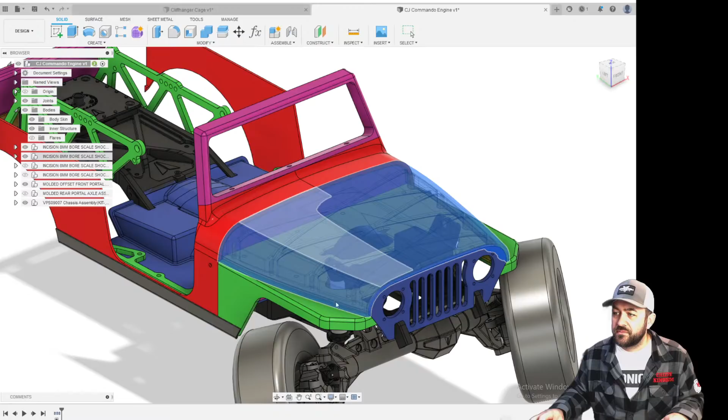We could even do that right now if I wanted - could delete that hood out, let it get mad at me for a moment. Whoops, we deleted far too much. That was fun. Undo, regen. Remove, not delete - that's what we needed.

So I'm going to go ahead and bring in the hood, we'll just do it from body split - that one should be correct. Make it a shaker, more space - not interested, I'm not interested in that look on a Jeep. That's not something this is going to be - I want it to still look like a normal vehicle should.

Let me try this one more time. I need to find the correct file - I think my front bumper one had the correct hood in there. I have a lot of files for this project, I didn't break it up well enough at the beginning, but I'm trying to do so more now towards the end where I only have to worry about what parts are in that vehicle. So, hood, bring it in. There we go - there's our regular everyday hood that will be in here.

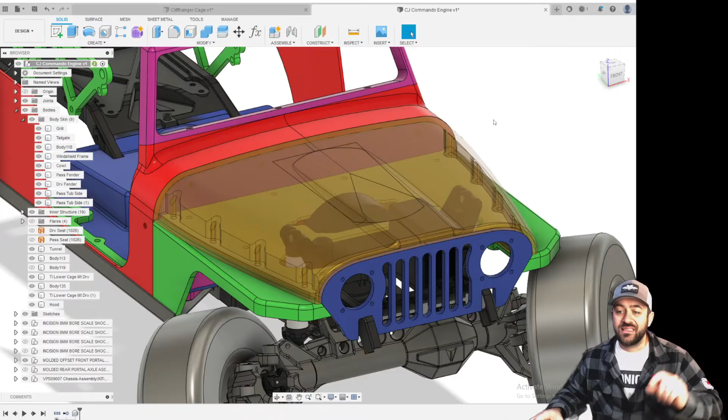So anyway, that is the point. Now, like I was saying, I wanted to bring in a model. I've downloaded what was on GrabCAD. I can go back to it for just a second and search LS Engine.

Here you see a bunch of different LS Engine things. Here's a bunch of different LS engines, from just heads to big supercharged LSX style, which actually looks like a really nice model, supercharged and all that. This is not the one I downloaded, although that's a very reasonable one to have. The one I have downloaded, I've had in the past, and it was this version, I believe.

It doesn't matter. Let's bring it in and see how it looks and what it's going to take. Actually, I can't do an insert derive, I have to bring in the actual file here, which I've got in a file I created, LS Engine. I already extracted it because it comes in a zip, so we've got IGS files, SAT, and STEP.

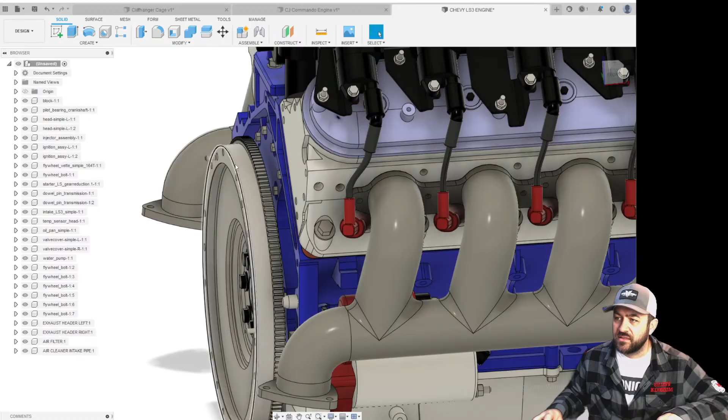Torque converter, bell housing, we got a flywheel. We aren't going to need these exhaust manifolds either, or flywheel bolts, water pump. We don't need any of that, so let's get rid of all of those things.

We got a lot of those, at least that hardware. Okay, that hardware is built in. We don't need a starter. There's another bolt. That's right in the block, that's okay. Air filter, we also are not going to need.

Don't need the intake pipe. We don't need the injector assembly. Things like this, we just have to be reasonable with the amount of detail. Even coil packs, we don't need coil packs. Now, the problem is they are part of...

Are they a part of the... No, that's just a similar color. Okay, I was going to say, it looked like they were part of the valve cover.

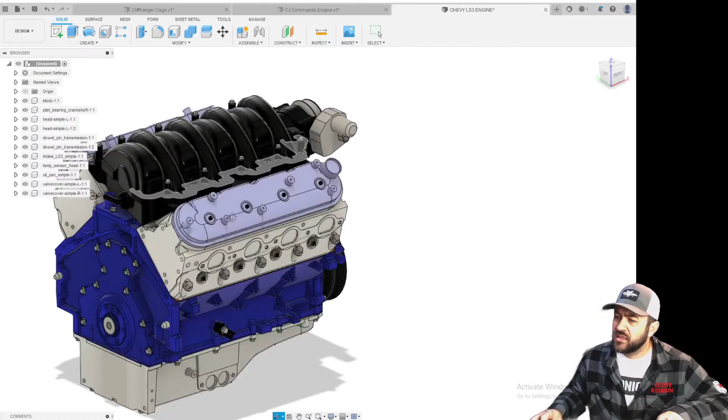So stripping this thing down, we're looking much better. Pilot bearing, don't need that for sure. Simple head, dowel pins, those are unneeded. Temp sensor, one temp sensor in there, get rid of that guy.

Josh has told me, how does Nicole make a coffee? Cream and sugar or just a... no, it's a Nespresso, so it's a little thing, mix it there, and then we have a milk frother, so I have nice foam, and this is actually coconut milk. Ah, so good.

Oil pan, even the oil pan we're not going to need because we have all kinds of things in the way, but we'll leave that on there for now. We'll leave the, oh, I guess the pulley is on the main block assembly. But either way, this thing is nice and detailed.

LSs are pretty common in Jeeps. This is very reasonable, and I mean even just race Jeeps. So we've got that, good, great, grand, wonderful.

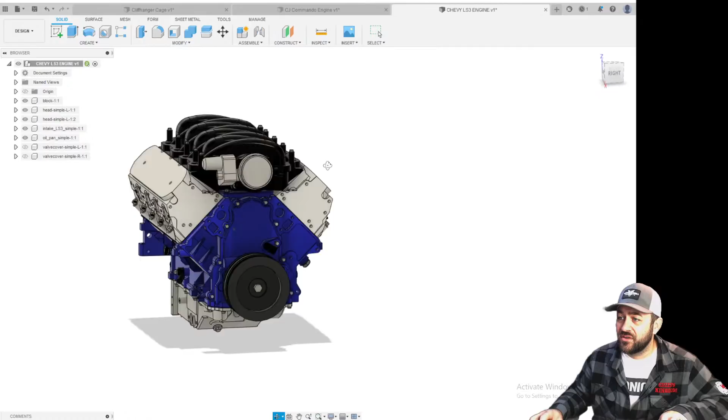Now, there is a number of things we could do. These are all still individual bodies that we can turn off, and we could start joining these bodies so that everything comes in easier, so that we could actually use it. But before we do that, let's see about bringing this thing in.

So we're going to do an insert. Oh wait, one thing, let's do it after the fact. I'm fine with that. Insert derive, Chevy LS3 V8 motor.

Please save and continue, I thought I already saved. All right, so now I selected the top one, held shift, selected the bottom one, so I had all bodies selected.

As you can see, this is a regular scale V8 motor. So what we are going to do is select all these, break the link so it's not referencing the old file, so any changes we make don't affect the original. We're also going to select them all and group them.

Do I have to do rigid group? I didn't think I had to do that. Oh, but these are components, so they're not the bodies in there. Let's see if I can do a rigid group, we'll just see if that works.

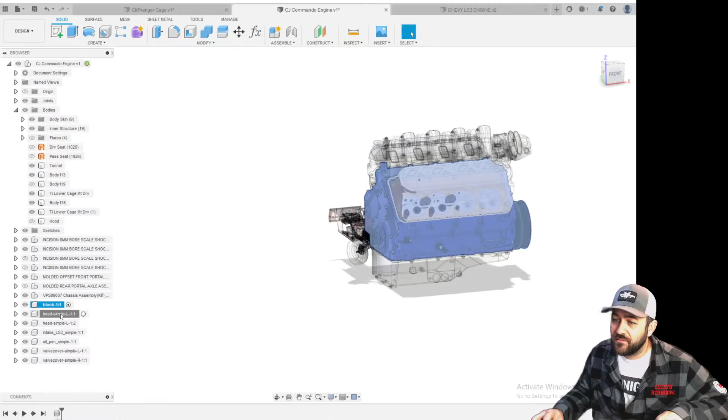Now we need to obviously scale this stuff, so we did the modify menu, drop down to scale. We are going to select... oh oops, that's not what we're doing. I selected the little radio button next to the component and that made it all... okay, I don't like the way that was going.

That's okay, so we're going to undo the rigid group and undo how we brought it in, because I want to make this as easy on myself as possible. Got rid of all of it.

We're going to go back into this one and do like I was saying. We're going to hit the combine button and combine the block, and then we're just going to start adding heads. Is head and valve cover one?

It is. That, intake, oil pan. Oh, valve covers were not included.

So now we've got everything, join, hit OK. I don't know why things are like disappearing slightly, but... why is the head?

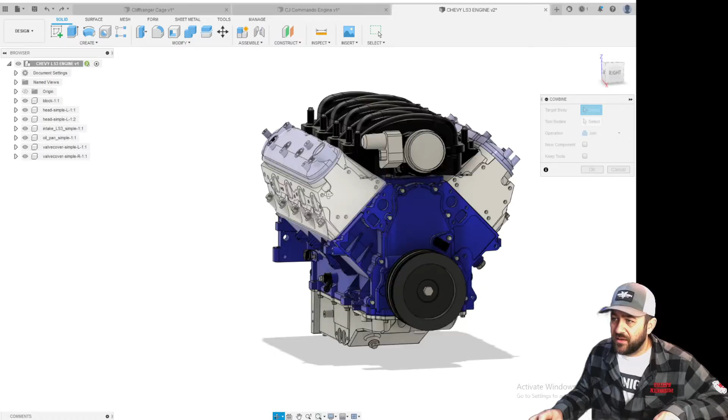Will this be on your 3D prints? No, no, this is going to be pretty specific to the class 1 truck, so it really doesn't make much sense to put up there. But I mean, this file, you know, we'll see. We'll see what this thing looks like, if it turns out to be something that's somewhat universal enough.

See, I don't understand why that thing is doing that. Nothing is being turned off. Let's do this in a weird way. Let's combine heads first, head and valve cover combined. Head and valve cover. Let's see.

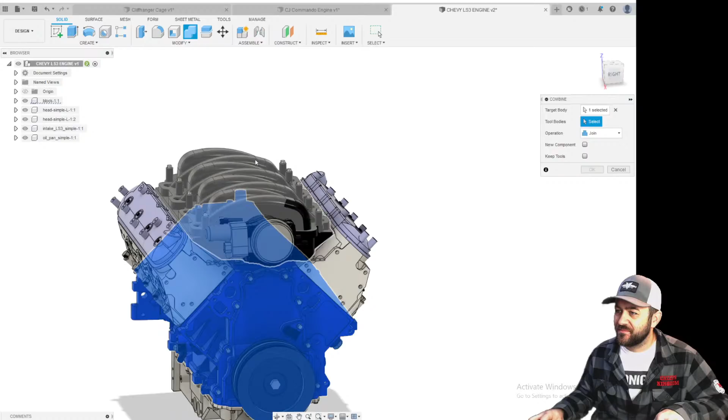I don't know why it's acting so weird. Oh, is that... oh, look at that, there's valve covers separately. Let's try that. Now let's join. That's bizarre, I hate it, I don't know why it's doing that. Let's join those things. That's all together now.

We're just gonna keep. I told you I don't bring in these things often, but that. Now, like I said, we could have... I must have keep tools on because I don't mean to do that, but that's the dumbest thing, when I select that one goes away. It's still there. Keep tools is not on. I'm gonna turn it on just because. That's so weird.

Is there such thing as too much detail using premium? There can't be, like every once in a while Fusion can absolutely act silly.

I don't know why, but Josh, when are you getting Nicole for Valentine's Day? Nicole and I don't really do gifts, we don't really get each other gifts that often.

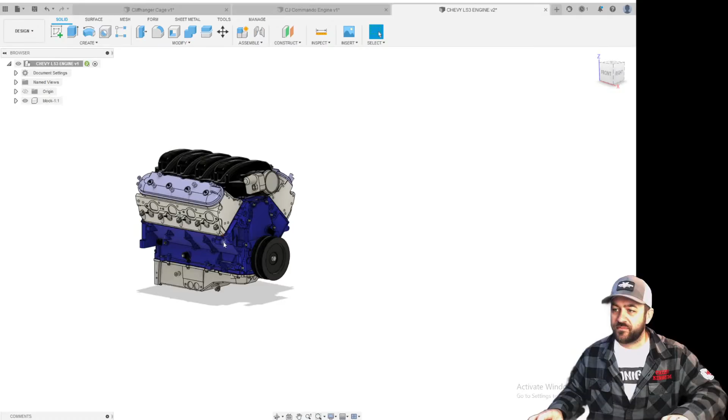Excuse me. Okay, now we're going to hit save again because this is all one body now, which makes this much easier.

Yes, Mr. Comma D does make one, however it would not work in this situation, it's much too big. Do I have one in here? I don't, I think I might have one of Mr. Comma D's here somewhere, but it's just a lot, it's just way too big for what we're trying to do for this thing.

Now it's all one body, so we can bring it in and easily scale as needed. As you can see, it's still quite large because we didn't change that, so we're going to scale it.

We're going to select it, and we're going to do uniform, and we're going to do 0.1 because that is 1/10 scale, and we're just going to see what that looks like. And it's probably too small, but that's okay.

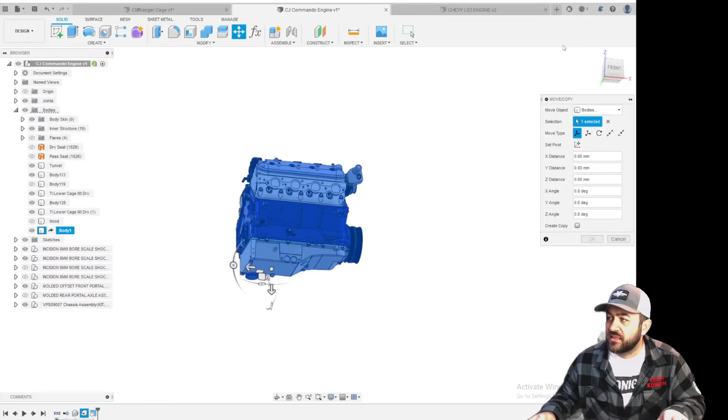Now let's get this thing moved around. Oh God, that's way too small. Way too small. We're just finding a flat surface to select to move this on, just because that makes moving it much easier.

Rotate it 90 degrees because I don't need it transverse.

And we're just going to continue to move it somewhat into position. Now I could move that center point onto an origin and so on. But the other thing is that this is really way too far forward to have it all the way up there. So we may get creative and get the engine moved back where it should be, and then maybe incorporate a radiator to cover the rest of the front, servos and things like that, just to make it all better. Let's get this moved down.

Like I said, we can tell this is way too small, but we need something to look at. Around the top of there, good deal. So we're gonna hit OK.

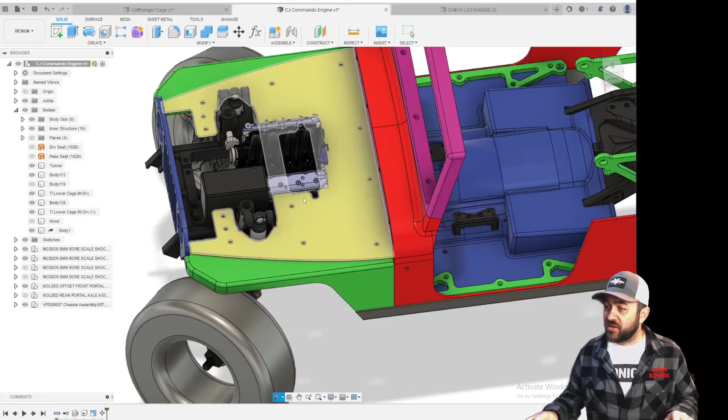Now, you can tell it fits between the shock towers all right, but I'm kind of okay if we need to work around or incorporate into the main part of the shock tower. We can go over that, and that's going to be fine. I'm not super concerned with this being the most scale accurate. I'm going for scale points here, like you may have gathered.

So we're going to select that body again. And rather than, well, let's not make poor decisions. Let's edit our previous, and rather than going to 1/10 scale, if we go 1 divided by 8, that's 0.125. So we're going to go 125 and then hit OK.

We'll see if it brings it back in and keeps it close to where it should be. So this is 1/8 scale. We can move it again a little bit.

I need to go up a hair. But we do need to, like, that is obvious. Oh, I'm going up and back. That thing was at an angle. That's okay. So like I said, I need to be conscious of the hood height, so I'm trying to just ease it into position.

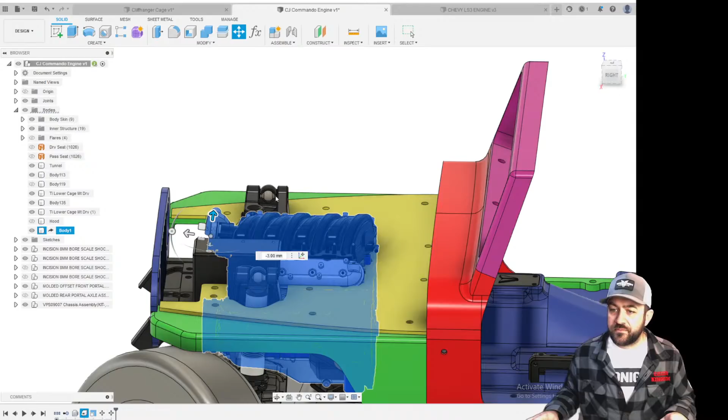Now, the things that I want to make sure that I'm covering are the spur gear cover, which is that guy there. Let's see. So as you can see, it kind of pops through that part of the hood, so we're going to make sure that we're covering that. I do want to move this engine further back, and we are not covering the servos yet, so that is something that we absolutely need to do.

I may still go larger with this. I guess it's kind of hard to scale this thing because everything's a little off. I guess let's just go with cowl width: 174 millimeters. I just want to do some super basic calculation.

What is the stock width of a Jeep CJ8? I know it's technically a Commando, but kind of CJ8 hood and so on. Height measured from the ground to the top, 1930. The width, there we go - let's just use that: 1,659 millimeters. It's handy that it came in millimeters, I'll tell you that.

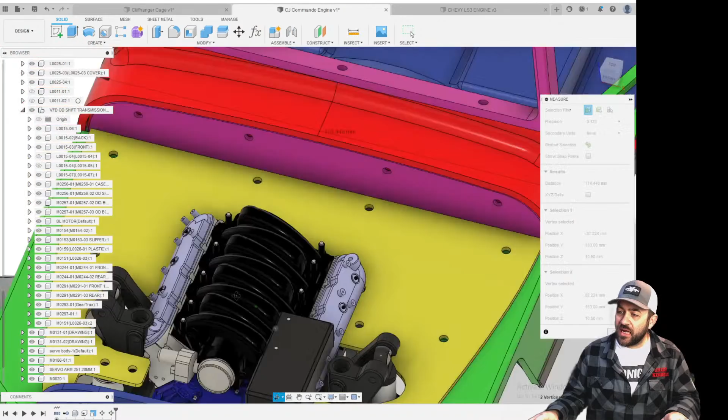So yeah, we're gonna have to get creative a little bit with the servo, because I also have a second servo that's going to be right next to it, basically the exact same size. So that's a thing to worry about.

Like I said, I think we'll get this to a spot where the engine can be moved back a little bit. We'll throw a radiator in the front to help cover the nose area and all of the servos. As far as the two big servos, we are going to have to get creative on how to get a surface all the way up there.

That is interesting. Not easy. An LS engine is almost not the best option for this just because of the shape of it. Or we get some of the LS... you know what we should do? We put some of the LS features in here. Maybe even move it back a little bit more towards where we want it, because I think this is still too far forward.

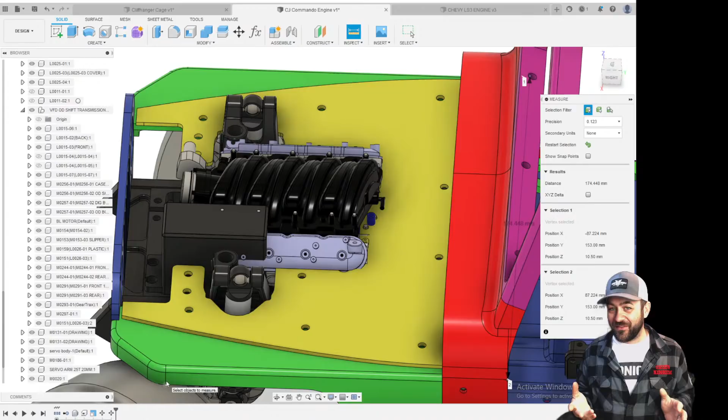I think that could be, yeah, look at how far forward. The front of that pulley should basically be behind the front axle tube. And the oil pan should be under the oil pan skid plate. That is in the VS410 for a reason.

Let's move this guy back to about where I think it should be. Right about there. That is the proper placement: oil pan under the skid, front accessory right behind the axle tube, right back by about the firewall.

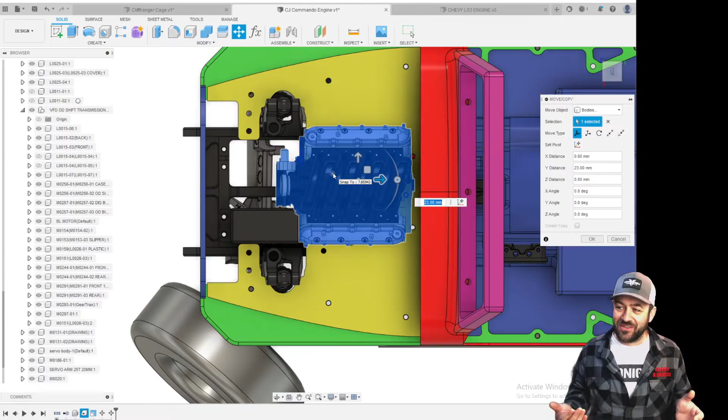Okay, and now the other thing is that to get the scale or the 3D engine points, I don't have to cover the servos. That's just other things, so I really don't need any of that to get the points I'm after. So I don't have to worry about it, but I was just trying to do it for the style. I guess we'll just hit OK with that position.

As we talked, again, it's the nature of design. We talked through some things here. We could make one of the servos just look like the intake air box, have a tube that runs right onto the side of it. Ryan Rose said exactly that same thing. What about a battery that can cover a fair amount of the space? That's a battery.

I think I had seen someone else mention doing some sort of dual battery look. Let's find that servo body detail there, and we need to mirror that over, because components selected and mirror plane is the right one. Hit OK. That way we have both servos in there to annoy us while we stare at everything, because that's about what we've got going on with the Holmes servo winch.

Do I have a Holmes steering servo in this? I don't yet, but I will. Okay, alright, I'm less concerned than I was at first, which is good.

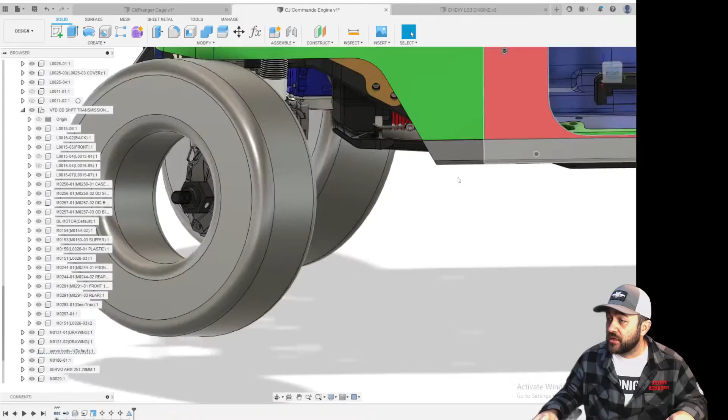What I want to do is we're going to turn that hood back on. Right there. I think most things in this will be fairly symmetrical, I'm gonna say. So we're gonna select the hood, hit bodies to split. That's up here, hit that one. Splitting tool, I'm gonna use the right plane. We're gonna hit OK. We're basically just going to do like a cross section, but the manual way.

So now I can see - ooh, I was pretty tight on my guess there. Alright, guess we're using that one. Oh man, oh we can break that link, don't need that referenced. So alright, well, we're not moving that anymore at all, ever. That is exactly where it has to be, within a couple millimeters. Too bad turbos aren't giant rectangles.

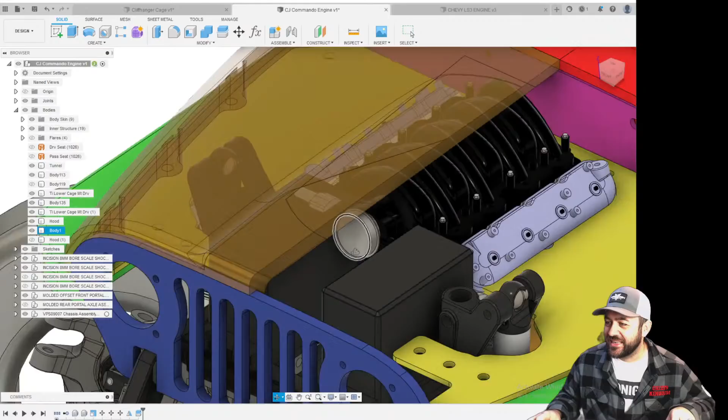Yeah, I mean, I'm all for the turbo look, but it's pretty hard to do without coming through the hood. I don't think I would be able to fake a turbo look at all. But again, that's okay, because this positioning is kind of fine.

Here's the thing: if we want to go the absolute easy route at this point, we just use this top plane as a cutting body, and we just cut the rest of the bottom of this whole motor off, and we kind of ignore it for the most part.

You know, I want to add some, you know, to appease the scale rules - the scale rule. What would you call them, not judges, but like the tech people - they're not going to want to see just this top portion of a motor. They're going to want to see more 3D and depth to it to get 3D points. So I'm not going to just cut that off.

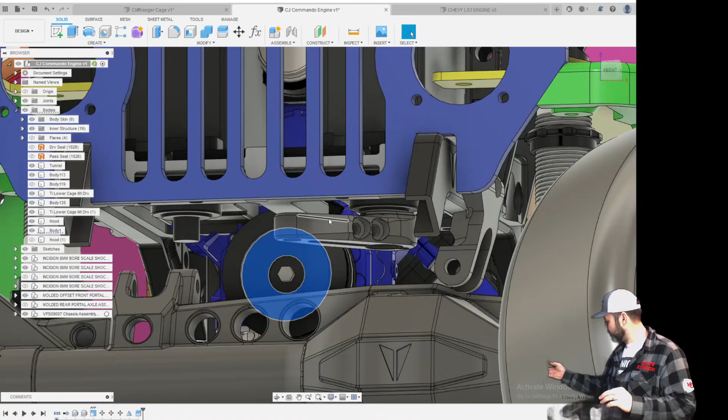What I'll probably do is look at how it will interact with everything underneath of it, like the transmission tunnel housing and all of this down here. And we're going to stuff as much of this LS engine as we can into this model. We may even find a way to get that front accessory drive down into the front of this thing, even if it's multi-piece, because it's going to be a little bit behind the servos, but you see how much of it I have in front of this.

And truthfully, I'm not running that cover, so I'm going to turn that cover off. Oops, not the whole thing, just the cover. So I've got the motor plate. Let's find.

So this is what I'm running up front. I've got the motor plate, you know, my pinion, spur gear, and all that. And that is what's poking through my engine bay. So I don't have as much in the way. And that, I think, is important.

This plate here, I'll definitely make out of carbon fiber, because I think what we're going to do is remove a little bit more of it. I'll use the added strength of the carbon fiber to help support everything. And we're gonna fake as much of this engine as we can in there to make sure that all of our scale points are easily handled.

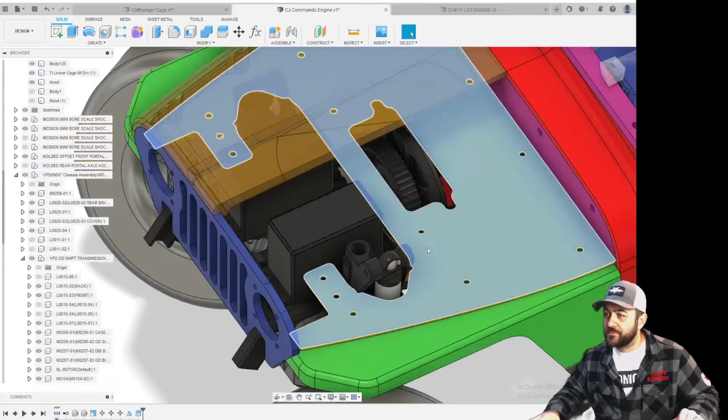Yeah, that's our goal. And that's why I was saying this engine model is not exactly the most universal thing, and why, as far as this project specifically, downloading and printing this one yourself is probably not on the list of things you're going to want to do. But maybe the process of downloading a file, dropping it in, and working with it will be the benefit of today's show for you.

Alrighty then. Everything's a little daunting at the beginning. No matter who you are, this stuff can be a little bit like, whoa, that's a lot to do. But let's just dive in and start making some bad decisions.

I'm going to cut this body up. So that's what we're going to do. We're going to select that whole engine, select that top, and cut it in half. But that's not the only cut I'm going to make. I'm going to make a few of them.

We're going to select probably the bottom half of the body this time. I'm calling it the body, I mean the engine - it's a body in CAD. So trying not to confuse you if you're not super duper familiar with what I'm saying.

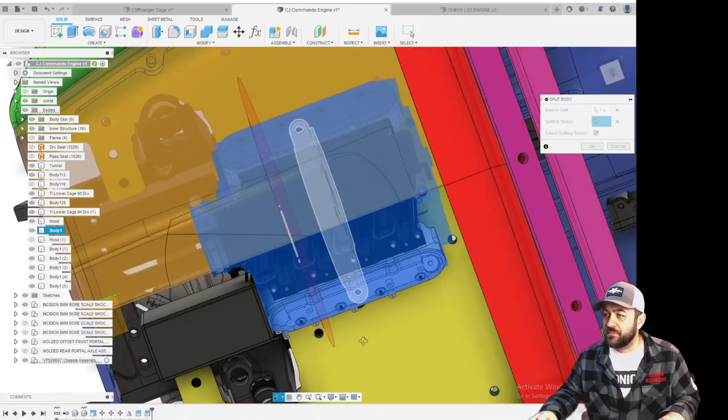Let's cut it around the face of that slipper, even though I'm not running the slipper version in this one, but we're at a pretty similar spot. So we're going to hit OK with that.

And I really did that just because it's going to make a separate body back here, this portion of the engine, and I can turn that off. And now I've got this front portion that sticks out. I mean, obviously it's still getting cut by still interfering with the spur and all that a little bit, but it gives me an idea of what's left.

So just made a few cuts there. I think I've got some straggler pieces like this guy, which let's just remove that. I've got a few little things up here at the top. So let's do a little bit of cleanup while we're going through this hectic part.

Can we turn off body skin? Got some structure we can turn off. There we go. These guys, remove those. Okay, what is that - that's that whole thing. Okay.

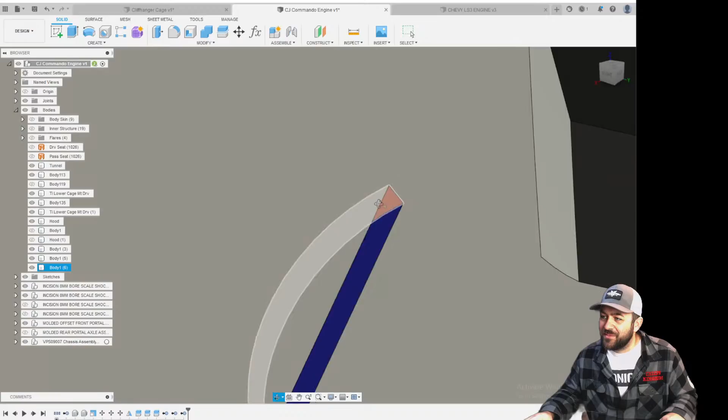When you're using a pre-existing model, you're going to end up with all kinds of weird pockets and shapes and just bizarre stuff. Depending on your level of pickiness and OCD, you could literally just about waste all of your time messing with that if you wanted.

But we're going to join this all back together real quick. So we're going to select the top body and the lower front one. Those should be really the only two that we care about. And join back together.

Now let's see - oh, so we got some random straggler up there. I don't know what it is, and I don't care, so we'll delete it, remove it. Good stuff. Oh, I think I had keep bodies on again. It's okay, we'll just remove that rather than going back.

Doesn't really matter. Now I'm going to isolate. Right click on the body, hit isolate. Gives us an idea of what we have left.

Now, I didn't do any cuts for the servo area yet, which, I mean, it seems silly to not do some sort of thinking about it this time. What if we just do this just quick and dirty way?

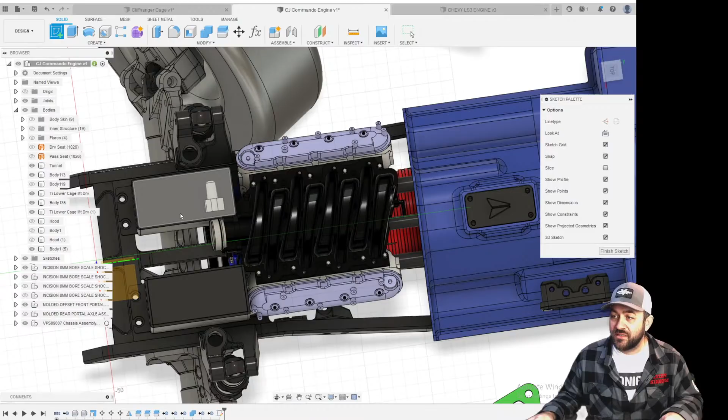And we do a sketch. We select the top of one of these servos to get us on that plane. We'll rotate square to it, and we're just going to do a couple of big rectangle cuts. I am going to make sure I'm not in the 3D sketch plane, so turn that off so it doesn't hyper select onto anything. We're just going to do something like that, and we'll do something down here as well.

Now let's throw a couple of dimensions on there. Let's give ourselves 1.5 mil of clearance on the sides, that matters specifically because servos wildly vary. You cannot count on servos being the same in almost any way, they're always different. This side, we're just going to stretch that out past because it doesn't really matter. And then over here, we'll do a collinear constraint just to make sure these two lines are in line with each other.

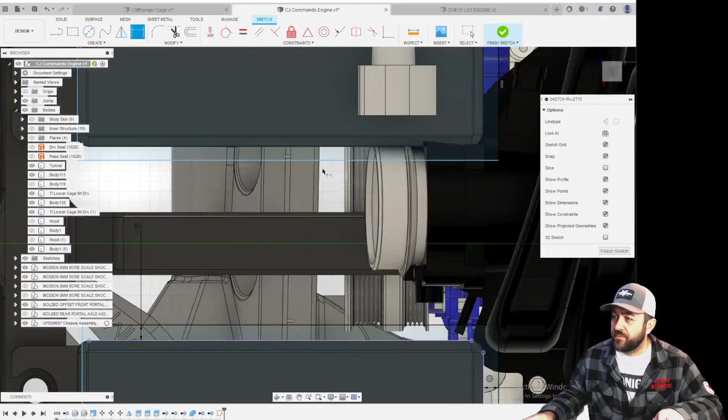I don't know why that didn't. There we go. 1.5 mil here. Stretch that out past. Now we're going to do a cut about like that. We'll turn this to symmetric as far as the direction thing, because we're just going to stretch this to the moon both ways. Make sure that it... let's just go well past.

But then in the objects to cut, we're going to drop that down, and really we only want body 1,5. There's going to be a lot of these that we need to deselect. I should have isolated and then saved myself all of this clicky time. But here we are, spending our Sundays together, pre-Super Bowl. Okay, we're almost there, 3 bodies left. There we go.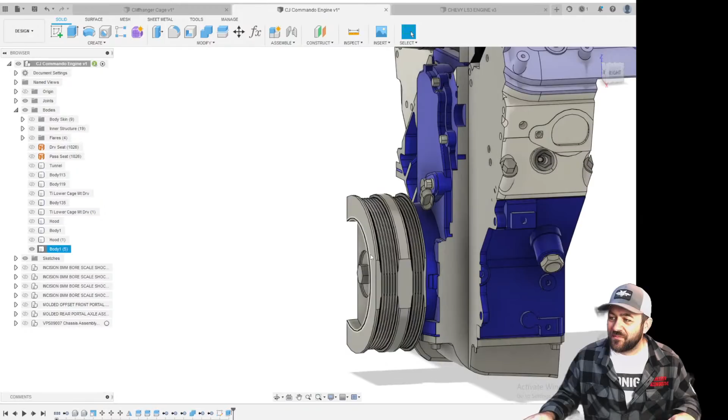So now we know. This still wouldn't fit, but it's closer. So now we're isolating, what did we cut off? We made a big old cut down there, down the front of this. Now I did cut that accessory up. It's fine, we could bring in all of this other stuff later, separate parts, whatnot. I am most interested right now in trying to make some sort of simplified model to work with, because this thing is far from simplified at this point.

Like, I really want to go in and just fill in all of these little voids so that I can stop looking at them, but I'm refraining for the moment. Might be a view angle, but the lump looks like it's off center. If you look at the throttle body at the front, shouldn't it be centered? I don't think that they are actually dead center or something. Or maybe maybe it is off. We can unisolate and check. No, it just wasn't centered. Well, that's probably a problem.

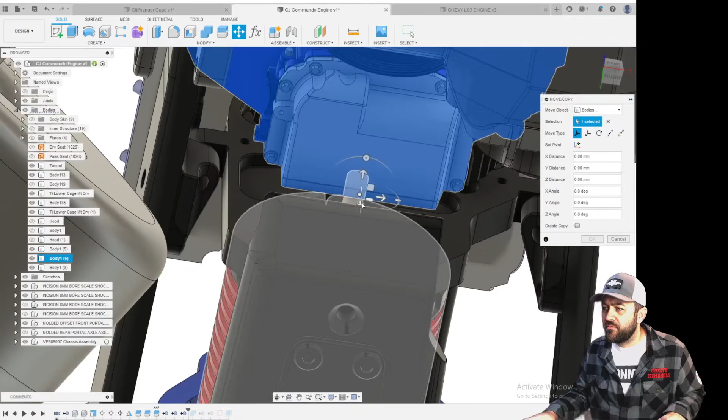Probably? Possibly. Let's see, we can go back to, let's just roll back the feature tree. The 2 cuts that we made are fine because those were not critical to anything. Or they were not critical to, whoops, I need both bodies selected. This one and this one.

Okay, then we'll set our pivot just on top of a servo and move it over. So let's try 4 millimeters. Let's try 3.5.

Okay, so we moved it. Now I'm going to move it forward. That servo cut will dive in. So there we go. Yes, I should have caught that for sure. Thank you for speaking up and making me read it.

So we do have the intake centered. Our cuts on the other sides are, I guess the heads are not equal as far as placement, but, oh no, significantly offset, but that's the model. That's not me, it's just, I guess, an LS. Well, that's good though, we can run an intake tubing right down the center now.

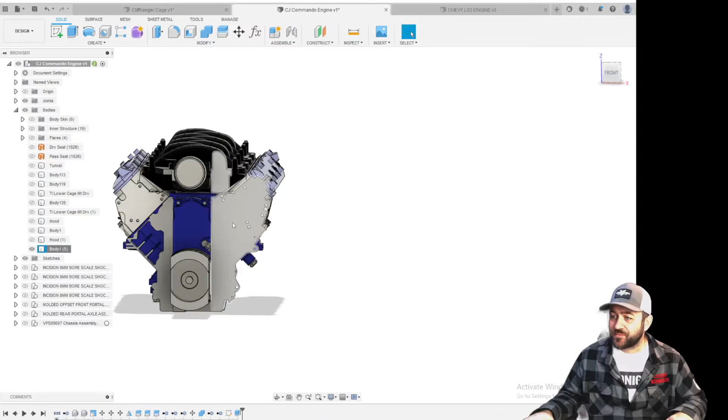This stuff all needs to get filled in before 3D printed. I mean, it doesn't need to, but like I got to. So let's turn some of this stuff back on, at least the structure. So we know we have clearance around the servo now. We've got an intake that goes right down the middle. This, you know, the header there.

The thing that I want to do is I want to go in and make a simplified style, like the billet LS valve covers. They look so much better than the just regular, you know, standard style that these things have. I'm fine with the molded style intake, be cool to do the big Frankenstein or whatever, but I need a pretty low rise, so we'll have to stay with this one. Yeah, LS has offset heads. You know what? I've never had to know that before, but I'm glad that I do now.

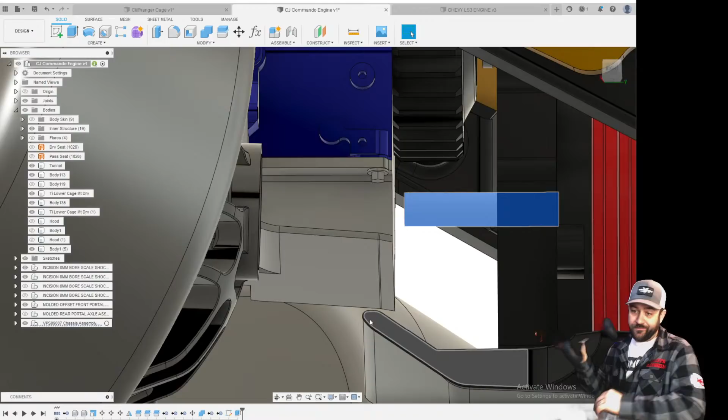I've got, so I'm just going to look at my actual model here. This motor that's in here is modeled after a Tekin Rock 412, which is what I don't have in this car. Why did I think I had the motor sitting in this car? Because I'm an idiot. So we're going to do some couple of actual physical, make some Cletus flag valve covers. Exactly, Motion Raceworks.

So I'm just measuring off the front. I need at least, what do I need here? Use my other ruler. Fatter.

I've got a lightweight motor plate in here, so I need at least 13 millimeters, so maybe 15 would be the smart way to go. And I need clearance for the lock nut that goes on the top shaft. But let's double check what I have. So from the face of this to here, I currently am at 10.6. So we're going to need to do a construction plane.

I'm going to select this. We're going to do 15 millimeters. And we're going to cut this guy again, cut with that tool because I need the space.

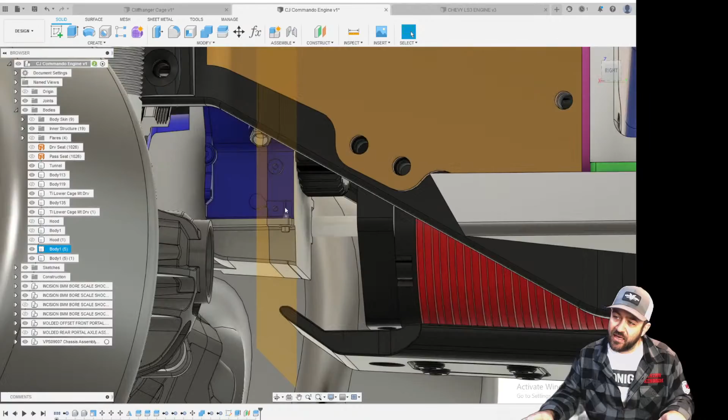Now again, you could get super detailed and make cutouts only around the size of the pinion. You could wrap the block further back around and try and make it look more complete. And all of that is possible, and I just straight up do not have time. So right now, later, I still have a 3D design file. I can easily go in and make those type of changes.

So we're going to find that little sliver that we just created, and we're going to remove it. We did that by making 2 cuts, and now I'm going to go back in and join those 2 bodies back together.

Titanium valve covers with your logo. That, I mean, that's a lot.

Oh, damn it, I keep forgetting to turn off keep tools. So I keep ending up with extra copies of everything. So I'm going to edit that last one. Turn off keep tools so we don't end up with doubles. Okay.

And we're going to go turn off that plane, which is in construction. Out of there. Okay.

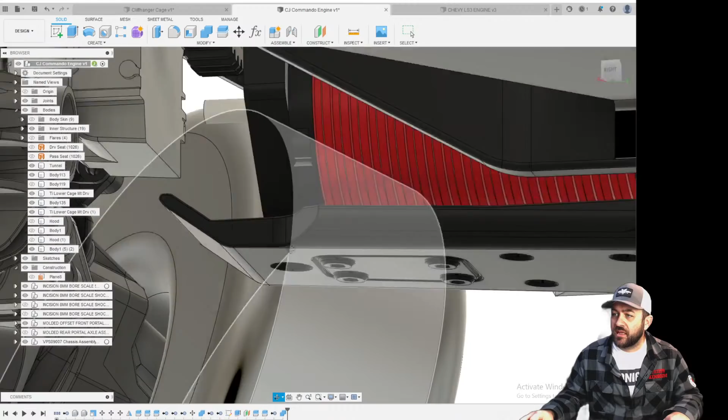So now we've got about the clearance that we need down here. Like I said, I still need, you see that top shaft coming in? And it's right there. I need clearance there. So I can just select the back side of this, which is going to spin me all around. Now I need to be on the center there, which the easiest way for me to do is I'm going to hit P for project. I'm just going to find that top shaft back there because it's all obviously concentric, and hit OK.

Now I can just turn off the rest of that. And we're just going to do a big old cut, because I also need to make sure that this thing will actually fit. So let's do, yeah, 15 millimeters is fine. We'll just cut in. Looks like I got plenty of room up there. So we're just going to do a good size relief, make sure that's all good.

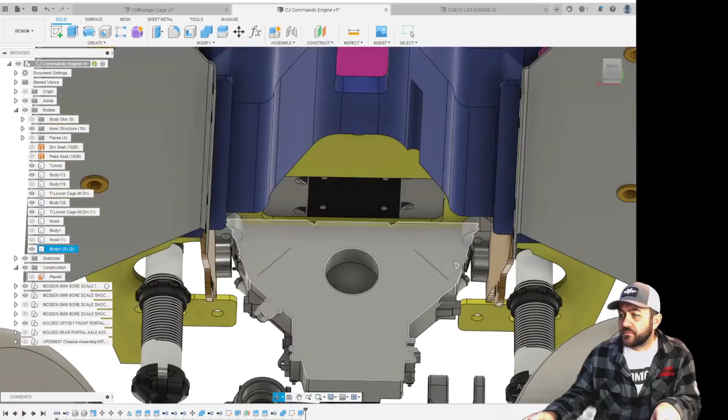Now, if I want to get weight conscious and all, we can come in and start hollowing out the backside of this completely. Makes it a little bit more difficult to 3D print.

The other thing that I'll probably want to do is I'll probably want to separate these valve covers, probably the intake, so that I can print them in different colors, so that this thing has a little bit of different look. But those are things that we just need to get to.

Let's turn body back on. So getting there with that.

You know, if we wanted to get, I talked about wrapping this thing around. I could probably bring the oil pan back in itself. Just bring the oil pan in from the previous model. We know the scale. Bring it in, line it, cut it, and then just have it hollowed out. Just have it sit along the side there. Super easy. Be a separate piece entirely.

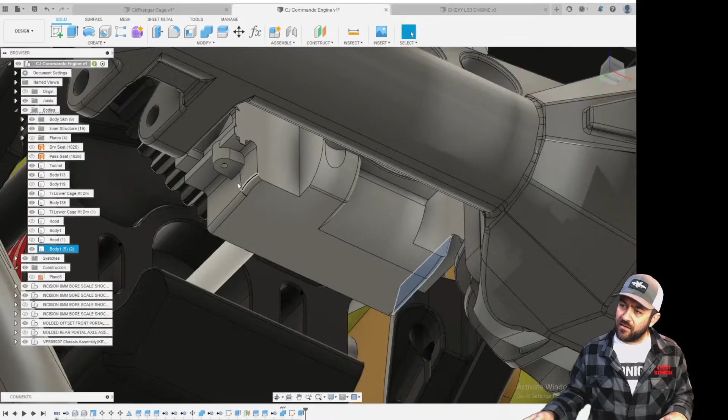That's maybe at least something I'll do, because from the side of this truck, you'll have these inner covers. If I can get an oil pan in there, which I believe starts... trying to see where the... okay, yeah, okay. So the oil pan would have started right here. That'll be the bottom of the flange. I could bring that in, and I could get a good chunk of oil pan along the side of this, modified to fit. We'd have a pretty reasonable representation of what an LS engine should be.

Hide the wheels. That's not a bad idea. It's not a bad idea to hide these wheels ever, because I obviously did a very basic job with them.

Okay. Another one down. And honestly, I really don't need the shocks shown. Okay.

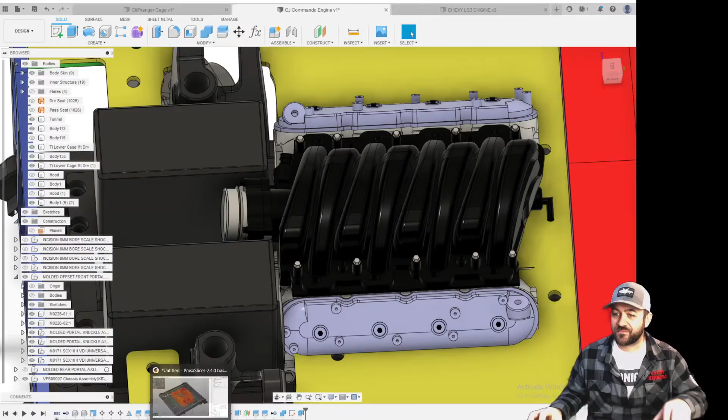I guess today really turned more into working with a random model that you bring in. I would make vertical grooves on the last hole to be able to slide it top down. Vertical grooves on the last hole - don't understand what you are asking there, or suggesting. Not saying it's a bad idea, I just don't understand what you're asking.

Let's do a couple of the other things. For the most part, this is going to be okay, other than we need to clean up some of the detail stuff. I'm not going to change a lot about it for now, we're going to call it good enough. But if we throw a radiator up front, scale points, easy ones. I think we turn one of these servos into an air box. The other one, we could do the battery thing, battery cover. They're all scale points. They're easy ones, just cake to do.

For the spurt - oh yeah, as far as how it's going to mount, yeah, like through one of those holes. Make one of the covers separate, or both of the covers separate. Let's just look at a sketch real quick for that.

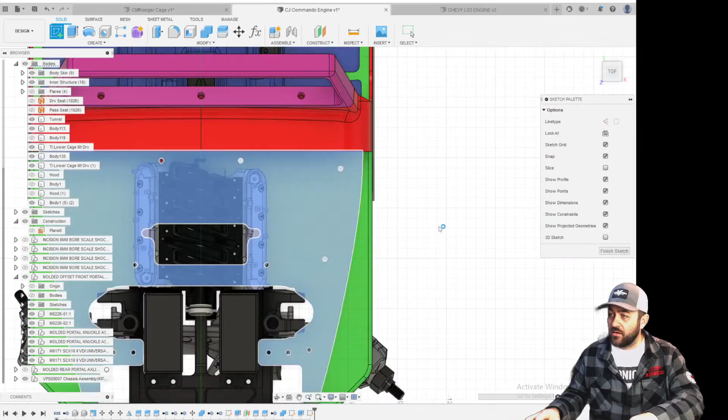So I'm going to just select that plane, hit P for project. We're going to rotate around, and I'm going to just grab those locations. And if we rotate around to the top - where art thou? Probably hard to see, I mean it's hard to see here too, but we can turn off that body.

Should have done it that way from the start, but it's amateur hour around here. You guys are used to that. Yeah, that's going to be damn near perfect. Perfect locations underneath of those to have a removable cap, drop on. Maybe we'll bolt them on with some scale hardware and just bang.

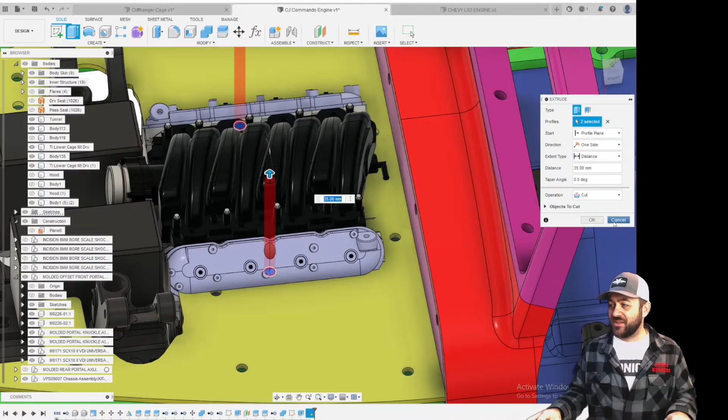So yeah, a little LS engine work. This one, again, one of those things, a little bit daunting just when you open it up and start. But if you just make some progress and put the pressure of a live video on you, sometimes things don't turn out so terrible. So I'm not going to make that cut yet, I just wanted to do that for my own knowledge. There's 100 ways better that could have been done to check, but like I said, live video.

One thing you guys rarely know is that when I sit here and draw, I'm oftentimes sitting Indian style, like a child. I also don't think I'm supposed to say that anymore. I'm sitting crisscross applesauce, as the kids say, which I had no idea that was a thing. Okay.

It's early, we're only an hour in, and we have something that, in reality, I could actually just be super lazy, throw this in the 3D printer, and damn near drop this thing in. So, you know, not bad for an hour. Not too shabby.

Let's see, if you're going for scale points, put the coils back on, use servos for air boxes, battery on the firewall - you know what, that's another just super easy scale point. I'm definitely not putting the coils back on, those things are way too tiny.

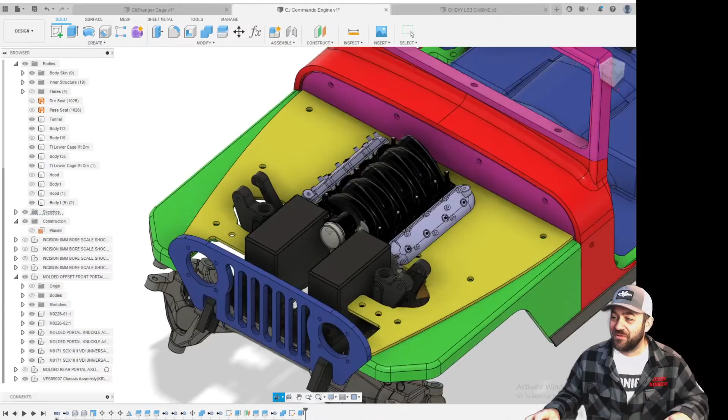Old school 350, non-LS would be better? Never, old school 350 is never better than an LS. Fight me. These are infinitely better, infinitely cooler. Just saying.

Let's work on the radiator first. Radiator, and then, so I'm just selecting the front of that servo, and then I'm going to offset 2 whole millimeters. Any chance I would design a gas pump nozzle?

Gas pump nozzle? I did a gas pump with a nozzle, I think, and it's already on my Thingiverse. Or do you mean a filler, like a filler thing? Please elaborate. Stop, collaborate, and listen, ice is back with a...

So another thing to think of is that these holes that I have in my grill are specifically made for the Vanquish Q series, which I think I have a set of here because I need them. Hold, please.

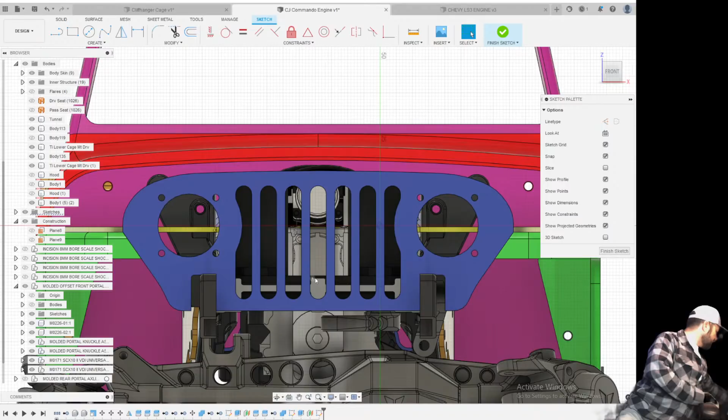The reason I wanted to look at that is because the hole pattern, these here, are actually very tight to the size of the housing. So there's very little extra needed on the outside, which is good to know.

We're going to be somewhat super generic, which is good. I just drew a rectangle and now I can see that I'm crashing through the... Okay, I'm going to project the top of that servo ear setup, so I have that as a reference.

And we're going to do... I need to make sure that I have room for screw heads as well. So let's do something like... I usually use these servo head screws, which are nice and flat. But just in case, I'm going to say 2-3 millimeters of clearance will do fine for a socket head cap screw.

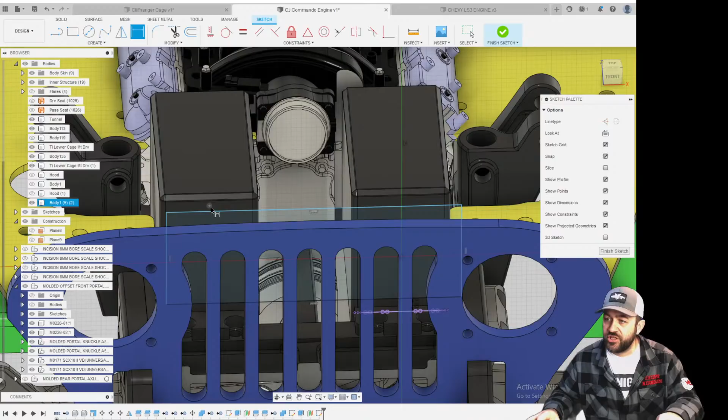What kind of computer am I using? This is a computer I built a couple of years ago. It's a Ryzen 5 3600, something like that. 16 gigs of RAM, EVGA 2060 KO graphics card, air cooled, not liquid cooled in here. M.2 SSD drive, pretty standard as far as specs go for a mid-range gaming PC if you were to compare - nothing wild. My editing PC in the other room would be much better suited for this, but I honestly always design in here.

So let's go 14 millimeters and see if that gets into my grill. Perfect.

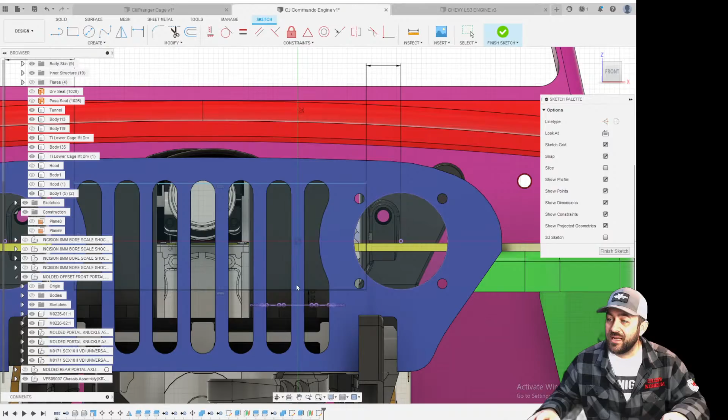14 per side. Now, you can see we're ending up with a pretty stubby radiator, but we can probably fix that once we start adding some depth. So that's okay.

Right now, let's go with 24 - oops, not 14 - 24 millimeters of height. That's about okay. So we're going to extrude that out.

I'm just looking down here below it. 8 millimeters is plenty. We don't want this thing to overheat though, so we're going to go with 9.

That gets us in front of the servo. Now I'm going to hide my grill.

Call me Paul Wall. No - Paul Wall, call me... who'd Paul Wall say? Call me somebody because I'm giving everybody grills. Paul.

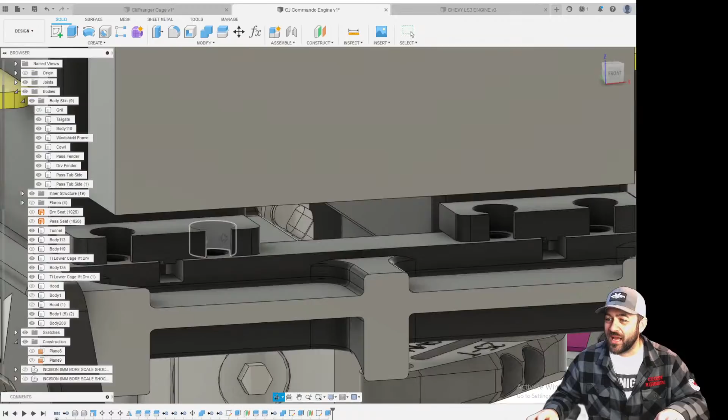So we got just past those servo ears, which is what I was after, because now I want to drop it down and get some more radiator style.

How many cores is your radiator? Oh, Paul said, call me the Iceman because I'm giving everybody chills. Someone look up the lyrics to that song because it's stuck in my head.

Projecting this geometry so I can offset it. Let's give myself, since I know this geometry - call me George Foreman because I'm giving everybody grills. Yes, thank you, Up North RC Factory - that has been the most helpful comment of the day.

Okay, so I offset 0.5 millimeters. Actually, I'm gonna - nah, 0.5 millimeter is fine. That's fine. I was thinking about being more accurate, but it's unnecessary.

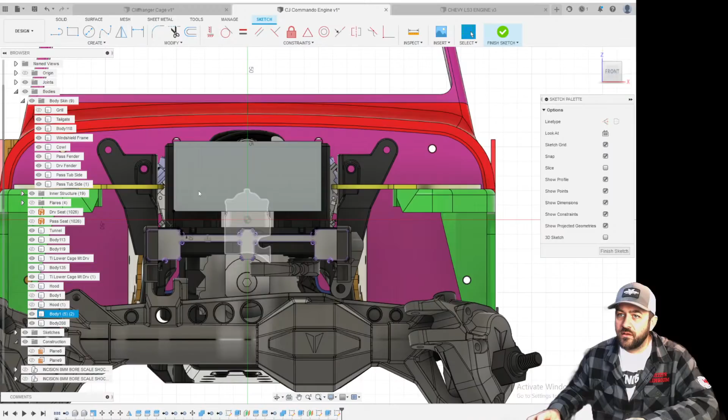Fuel cell in the bed, like heavy. John, go look on my Thingiverse - I did a vintage style fuel pump. I think I did a gas filler on that too, so you can download that and there should be a file in there.

Why? I've got a hole in my profile somewhere. It's not there - I offset that whole thing, so that's not it. Oh, look at that, why did that do that? I bet I've got that same hole on the other side. Right there.

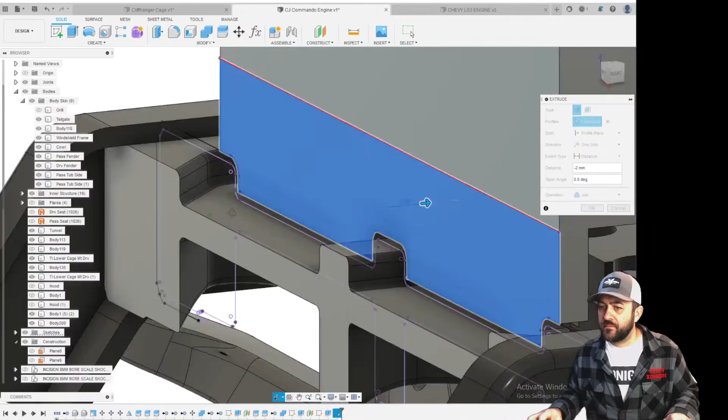And now this is going to turn blue. It did. Okay. We'll be able to tell when it interferes because it'll turn red. Right there, see, at 3 millimeters it turned red. So we're going to go -2, that's fine. Hit OK.

Notches around that post and all that, which is fine. Granted, I don't know how much of this - I may actually cut this brace off to about like that, because how the grill is going to come down, it's going to be right in front of that. Now that's probably tighter than it will be - I'll give myself a little more wiggle room, but I'm going to cut that chassis brace off, and then the grill is going to extend down between the frame rails. It'll give the front of the car a little more visual height without having to make it taller. That was kind of why I went that route.

So this is something I'm going to have to get to very soon - cutting the chassis off, cutting the chassis braces, and then building the front bumper.

If you use stock servo screws, they extend past the lip of the servo - that's a reasonable thought. Let's turn off the body skins real quick. I think I've got room, but that's a very reasonable thing - I'm probably actually about right, pretty close.

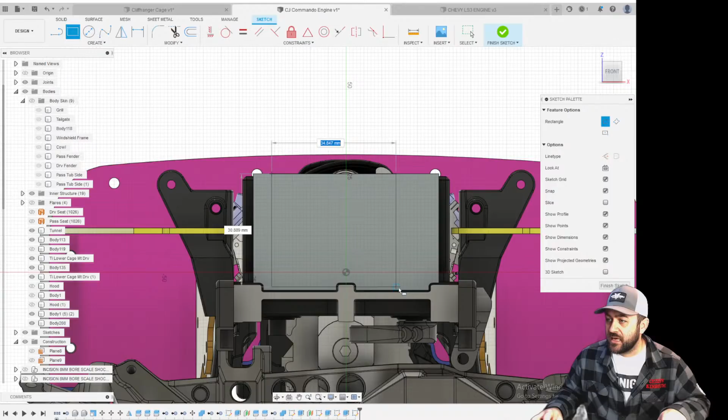So I need to detail this thing up a little bit before I move on. I don't want to go much bigger. I need to whittle this down to the style I want, since we built it to the size we need. We won't spend time on the back side, but let's make it tank style by shredding down the inside of it a little.

We'll go 5 millimeter, put a good sized tank on each side. Let's go in. Do we need to go in a whole millimeter? Sure, we can always adjust. For effect, let's throw the radii on the corners already, something like that. Before I do the top, I want to cut down the center just a little so it doesn't carry our radius around it.

Go down 1 again. We've got to put a cap on one side and all that. You need a radiator cap. Yep, absolutely, I agree.

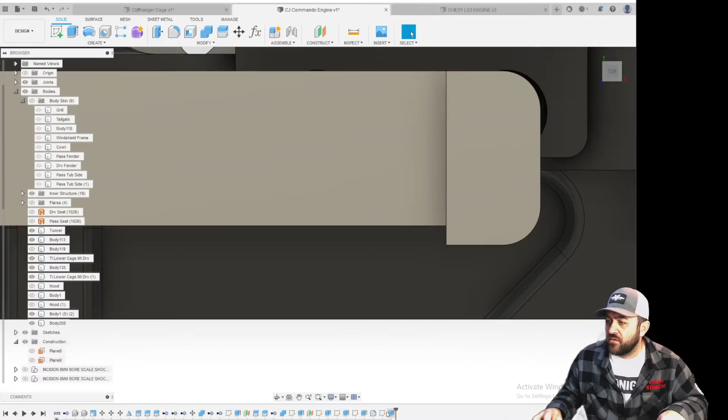So yeah, that one is too much on that one. Oh, that was. This is not properly defined. There we go. But I'm also going to go down by, I'm only going to go down like a half millimeter, negative 0.5. We don't need it as pronounced there.

Now let's, whoops. Why is that not? Oh, tangent chain is off. So tangent chain on, there we go. We can grab those two, 45 a corner and add a cap. We could do a 45 on the corner. I have no issue with that.

We're gonna do something along these lines. We'll just do that on one side. And we'll throw a 45 on there, even though 45 is fine.

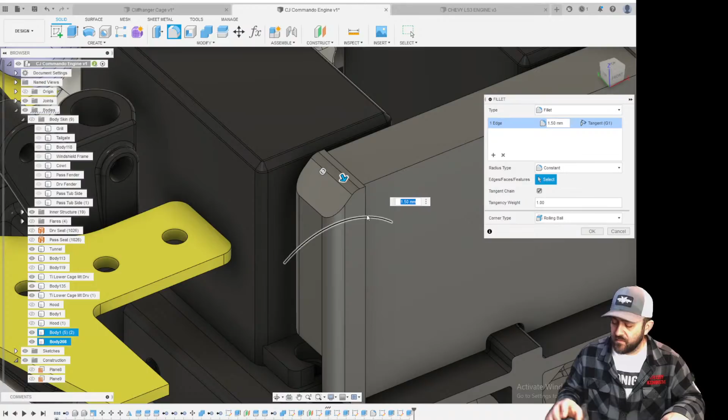Something like so. We're still going to put a radius there. Let's do some, oops. Let's do a 3. Nope, 1.5. That. Now tangent chain is on. Let's do both of these sides at a 1.

We're going to throw a real slight radius on these. What's 1 look like? Too much. 0.5. Something like that. We'll print this whole thing in Galaxy Silver on the Prusa, so it'll look great.

We're gonna do the whole slat pattern, you know. So we're gonna grab and do a, now this is gonna be a pretty thin feature, so we need to make sure that we think about the width of our extruder, or I'll probably do this laying down.

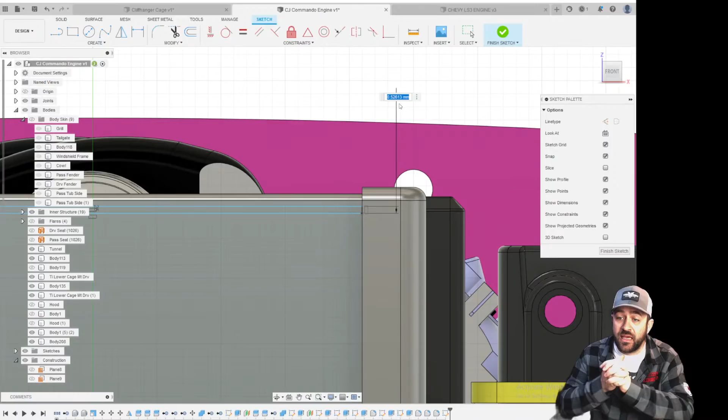So actually I could do it standing up, so then I just need to make it a layer height thing. I'll probably print this at 0.15 millimeters. So let's just go 0.3 millimeter height, and then we'll do a 0.3 millimeter spacing.

Which is gonna be a lot, but so then we're going to do a rectangular pattern, even though we're only going to pattern one way. So we've got that, and then we need to go down. Our spacing, we're going to do the actual spacing, and then we can do at negative 0.6, and then that's the height of our piece and then the actual spacing.

So now we just need to crank up the instances until, oh, it's going to hate us so much on this. Ugh, let's see, we need to double that. We're going to go to 1.2 because, no, that looks like crap. Let's go 0.9, we're going to double the spacing between them.

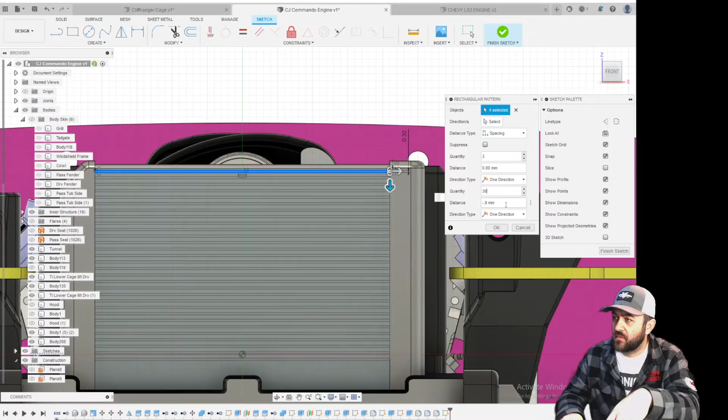Could you just use a fine Sharpie and draw a line? I mean, you could, but they wouldn't be straight and it would probably look terrible. And I'd rather have a robot do the work while I do something else, and a robot is going to do it nearly perfect, whereas I will get frustrated after 4 of the lines and decide not to. So robots are better.

That is. So we're just going to come out by 0.2, that's half the extrusion height. And basically it's just going to give us a texture for the 3D print. It's very slight, hardly noticeable, but in the actual 3D print it will give us that texture that will break it up. Oh, I forgot that side over there.

Oops, nope, not edit sketch. Edit feature.

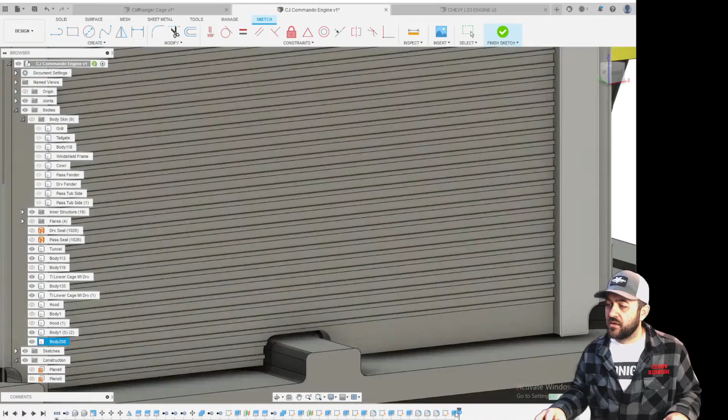Got him. Okay. So we haven't put the cap in yet. We need to do that.

Let's see. Let's just throw a circle on here. Let's go with a... we'll go 3 for now. Or, no, we're going to go 2.5. Oh wait, no, I know what I'm going to do. I'm going to go 3.5. We're going to do a line. I did a construction line. That's why it's dotted. I hit X to toggle between.

We're going to center it on that. I should have done my line top to bottom, so we're going to delete that. We're going to act like you guys didn't see it. And we're going to recenter.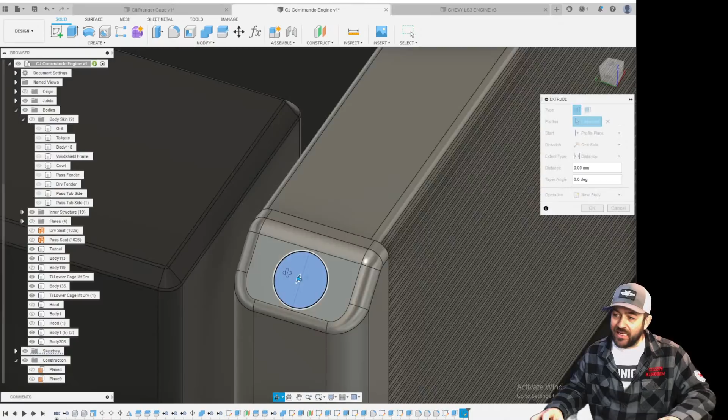And I happen to have extras of those, so I'm just going to grab myself an extra, and I'll have a nice little red anodized aluminum cap that'll thread in there. Woo! Fancy.

So the only thing is that we gave ourselves all this room and space and made sure that it didn't touch anything, but it doesn't touch anything. So we have to mount this thing somehow, which would be a great idea, don't you think? I can't use the screws that mount the servo in because they're literally blocked by the whole deal. I can give myself a mounting foot area here, or I can give myself a mounting foot area and then do a screw hole that goes up from the bottom so that I can get into it.

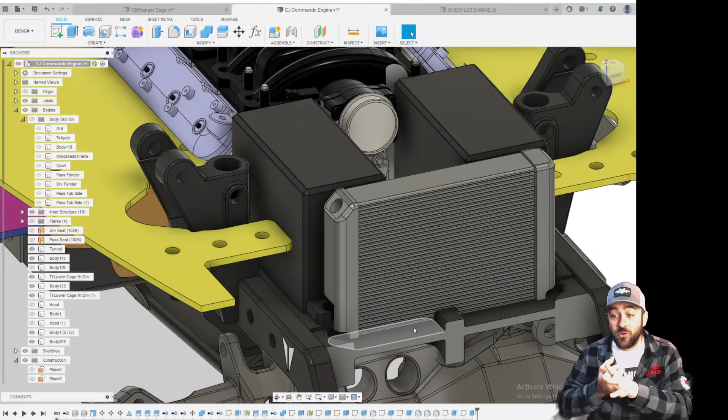I also need to make sure that I have room for a winch servo line to come through. So I've got to put a big hole in this thing somewhere because I got to route winch line through this. But that still has to be integrated with said grill as well. So that, I also have the front bumper where that integrates. There's details about this still that I need to, well, let's look at it.

Let's bring it in. Let's bring in the bumper. Front bumper.

Is this a one-off or are you going to produce this? This is a one-off. This is all for one project that I will be so sick of by the end that I will refuse to ever make another.

Use a VS4-10 Pro electric radiator fan for scale points. That's a good idea, Craig. Yeah, we'll throw a... I like that. We should... that's an easy... ah, damn it. I grabbed everything by accident.

And like you said, it's an easy scale point because I refuse to add the rest of the little doodads. I'm not going to run a driver passenger. I'm not going to...

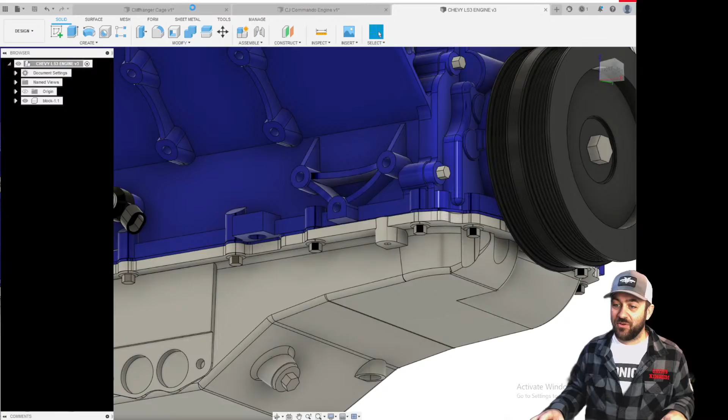So we may go that route. But like I said, I got a winch line that's got to come through probably right in here. It's got to come out of this winch and then get to there.

When a company is designing to build a new RC toy, do they go through basically what you've been doing? Yeah, but things are much more thought out. Everything I'm doing here is just like winging it, close enough. So much of what I've got here is tough because you have to look at how things assemble and making sure that this isn't going to block that. There's such a huge list of things that you have to make sure you look at to make sure it's functional to actually build as a regular consumer.

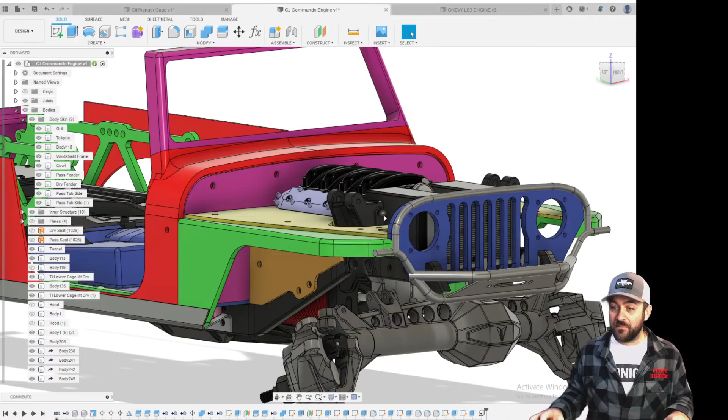So yeah, F10 portals, aren't those Phoenix portals? These are the F10 axles from the Phoenix portal kit. They're called F10s though.

So I'm not going to get too worried about throwing a hole through the middle of this radiator yet until I kind of work out some of that winch servo stuff. So that's kind of still up in the air.

I mean, like I was saying, we could just turn both of these servo things into air boxes, couldn't we? Just make it easy, rather than doing like a battery setup, because it'd be a weird spot for a battery. Brake booster, all that kind of random crap should be further back. I think we just do a little split intake setup, and we make a cover that goes over the pair of them, and I'll put an H on one side and a D on the other. HD. Super intake.

Good thing you're not going through all that. Yeah, absolutely, it would take me even longer. Dual air boxes for the win. I think that is a grand plan. Great, grand, wonderful.

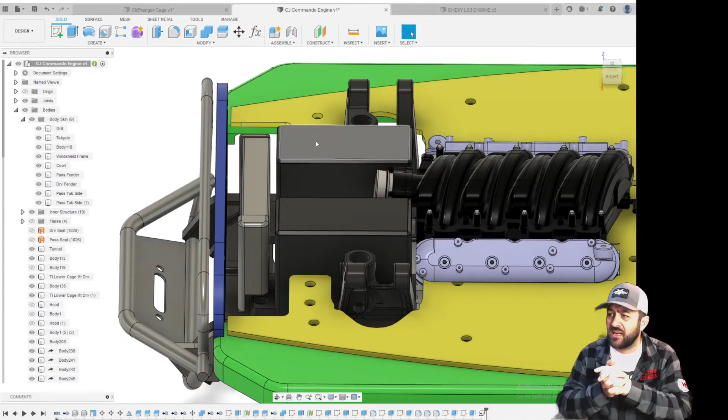So let's do it. Now, I think we make a couple of covers that go over them still, like just a simple little cover setup, drop over the top.

Make sure that I give enough room. I do not have, here's the other issue. Let me turn the hood back on. Man, look at how close we are with that radiator too. It's so close.

We didn't check that, but I had an idea, and it's a good thing I added that fillet. So we don't have much room on top here to add our airbox cap.

Snorkel, never. I have a personal vendetta against snorkels. I hate them. I hate snorkels so much. It's unreasonable how much I dislike snorkels. I don't know why it is. I cannot explain my quirks, but I know there are many.

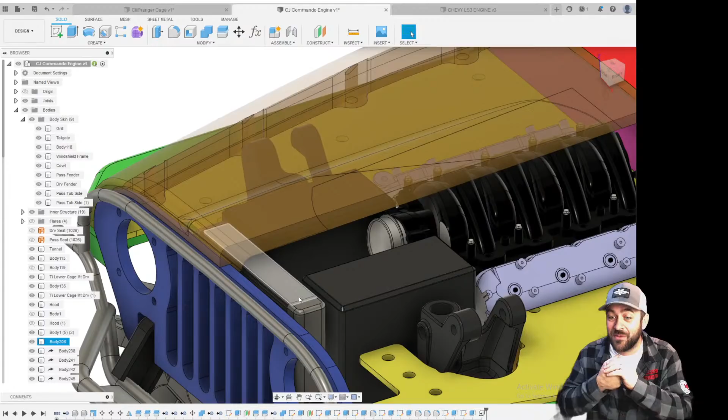Don't forget the servo wires stick out some on that radiator side. Also a good point, also a good point.

A little notch. You know what? We'll notch the radiator, and then we'll make our airbox cover go over it, and just kind of bridge across. And maybe that's how we attach the radiator and everything, is we attach the radiator to that airbox cover, and that airbox cover just double side tapes to the servos.

Because it's something very simple, silly, stupid. So it could easily, or I do have these mounting points out here that I added for shits and giggles, as the term goes. But I could put an M3 riv nut in these on each side, because this will be carbon fiber. So I'll put an M3 riv nut in there. It'll come over and it'll have one screw on each side. Then I don't have to have any double-sided tape, because that would be hokey.

This is all for just something simple and stupid. Hopefully this effort is not all wasted in the end. And...

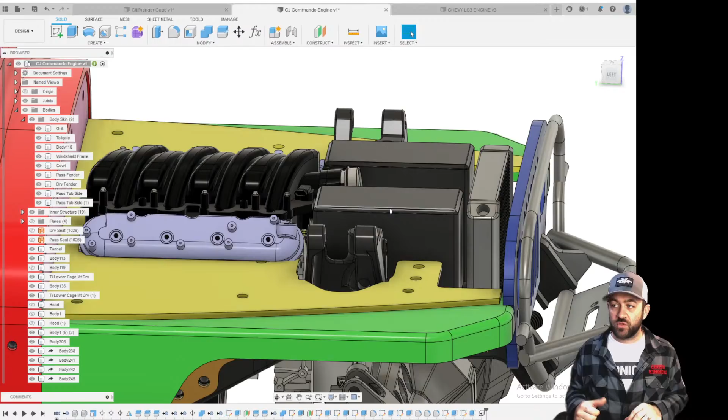What do the servos look like? No, need a cover. They're fairly good looking black aluminum servos, but it's still a servo. If I put this cover on them, you really will, you'll barely be able to tell anything. So it's just a little thing.

No, I agree, they don't necessarily need a servo cover, but you're definitely gonna be able to tell it's a servo winch when you're looking at it here, and there's a big hole in the side with the winch line and all that coming out. So it's just something.

Belts? No room for belts, really. The main drive pulley down here is currently cut up. It needs to get cut up more, or cut off completely, because it will interfere with this chassis brace, which I could probably do some more trimming on that motor cover now, even, to get it somewhat, I don't know what you want to call it, like more in line. I don't know. What am I saying?

But that's the point. So yeah, I'll do a cover setup over the top of these two both. We'll make it look somewhat like an air box, something like a decorative cover air box slash, it'll be my radiator mount. I'll make sure that it's exposed for my fancy radiator cap, because you need to have access to a radiator cap.

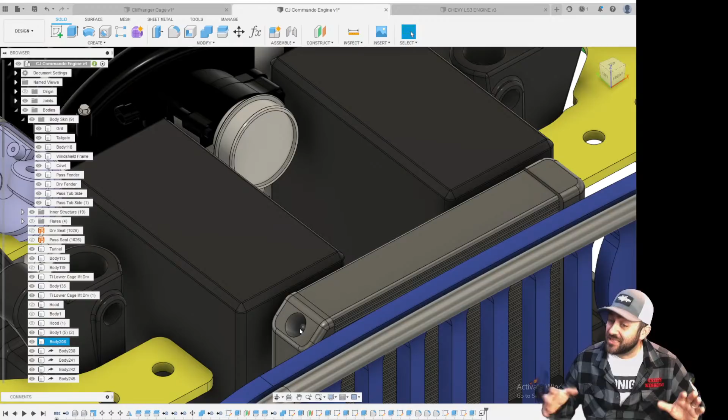So we have almost no height, so there's very little feature we can add to this. It needs to be a very thin cover over the top to clear the hood. Oh, that's the other side of the hood. It needs to be very thin and to the point. Anywhere where I have room to go down for feature is what I'll need to do there, which is fine. We won't need much.

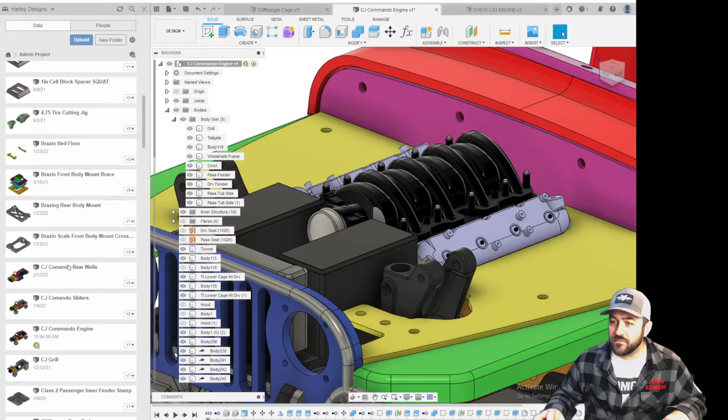You're getting away from the main objective of scale points and the old saying, keep it simple, stupid. I can't, I know that was the main point. I literally can't do it. I cannot keep myself from doing it.

So we had the interior of this with this pan that we vacuum formed before, but if you guys remember, the rear of this vehicle is just wide open. You can just see through the chassis, right? These areas back here, see? You shouldn't see my finger, because that's the interior.

Let's go back to Fusion. So I worked on this yesterday, which you can see is just a great big block of material, but that's because this will then be vacuum formed as well. The nice thing with designing the vacuum forming molds is that I don't have to worry about what's underneath it, I just have to worry about my top structure.

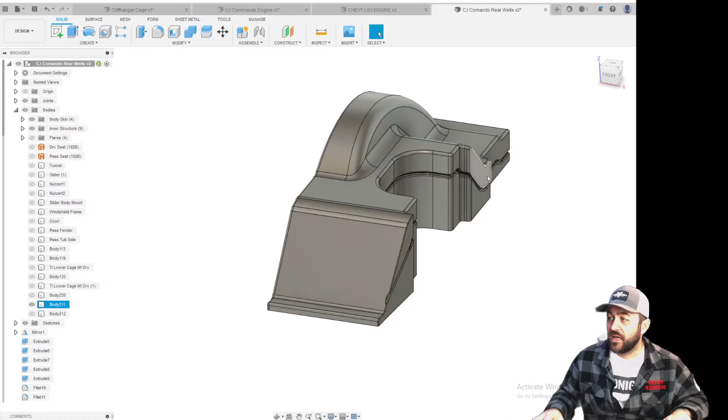Let me find that body in the model. Now, I did some things that I know are not the best on this. I don't have any draft angle. Normally with these vacuum molds, you want a little bit of a taper out, and I didn't do that. But this is kind of an experiment.

I put this line in and around, which will make this more difficult to remove because the plastic should suck into that a little bit. But it's like to give myself a bit of a trim line. This will be the surface where this attaches to the body, because the plastic will suck down around, hopefully go into there a little bit, and then it'll get trimmed along that.

Those lines were defined by the chassis, so it'll sit basically above the edge of the chassis. This one is in where the shock is, so that one will probably get trimmed further up. There's no need to have that flashing come down.

Now I made this opening here large enough where the shock can move to any of the positions. And I made it so that it's properly notched around all of my titanium work. See that? Goes around and around the whole way, all of them. This was actually a pretty reasonably fast thing to do.

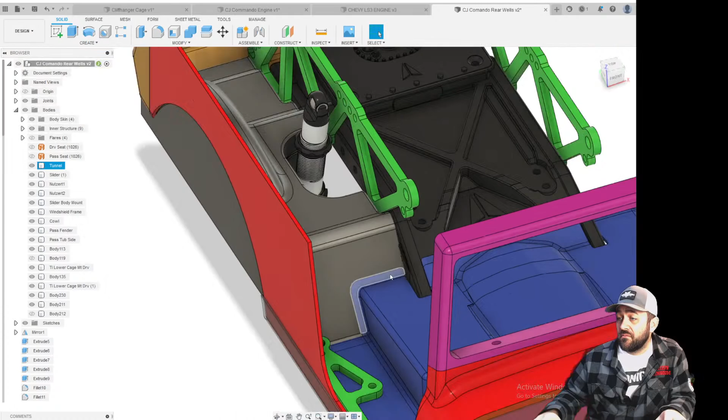I cut this, you can see there's a little bit of an interference there. Do I have a homemade vacuum machine? I actually have a store-bought machine. I've done a couple of videos on it, covered it in one of the Road to Scale Nationals videos as well.

So that's the plan. I have the vacuum formed interior in there, the front part of the interior in there already, and it just drops in and it's so perfectly fit. I'm looking forward to that being the case in the rear.

So I printed the molds last night, so I've got both left and rights. Now these are basically hollow underneath, that's infill but at 5%. I'm going to backfill each and every one of those little pockets with plaster before I vacuum form it, because it's thin, but that should give me the structure.

Made this like a 7-hour print for both pieces. I bet I have 200 plus hours of 3D printing on this project alone, and almost none of the parts that will be in the rig at the end are 3D printed. There will be so few 3D printed parts, yet hundreds of hours of 3D printer time.

Pretty ridiculous. All that ribbing about his foam interior has led to this. I did go overboard, I agree. But this is going to make for a pretty rad interior. I'm excited.

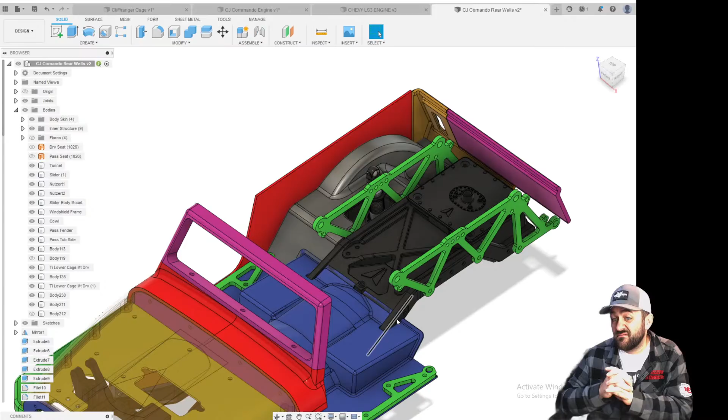What is the future of this rig after Nats? I'll probably own it for a while until I'm ready to not own it anymore, and then I'll sell it, because I normally sell everything. I don't necessarily hold on to things forever. So we'll get to a point and then it will go away.

Fly away. Will your home CNC mill do aluminum? It can do aluminum, it's not great for it. It's loud. It's just not. If I really wanted to do aluminum, I would need to spend the time, write the toolpaths, and do it at work. But I'm also likely not going to do that.

So anyway, this is one rig you should keep. I know, but there's always a next rig, because no matter what, this whole project, the whole thing, I always know there's things I can do better. I should do better, I'll learn from it and do better next time. I can always build another, and I will. I'll build another something. So I'm just not big on having to keep it.

And the other thing is, I'm not going to lie, I've spent a large amount of money on materials and tools and all of that stuff for this type of truck, and it's for the channel. YouTube helps pay for those things, but I can't just always keep doing that without trying to recoup something, because it can get spendy.